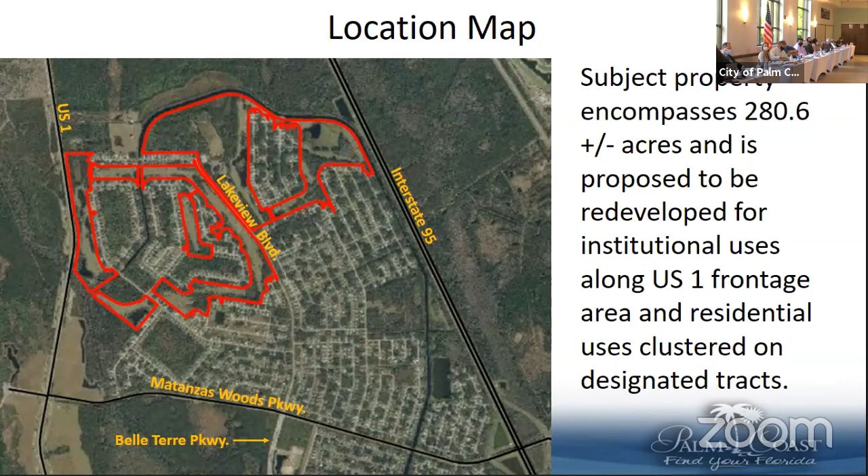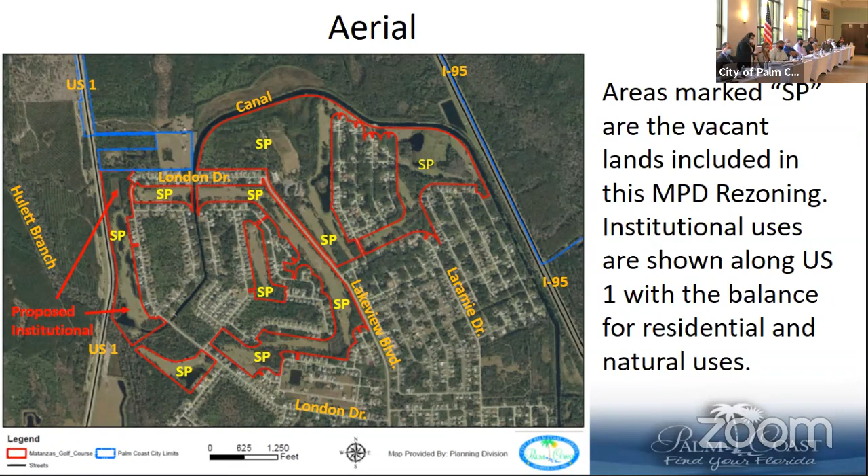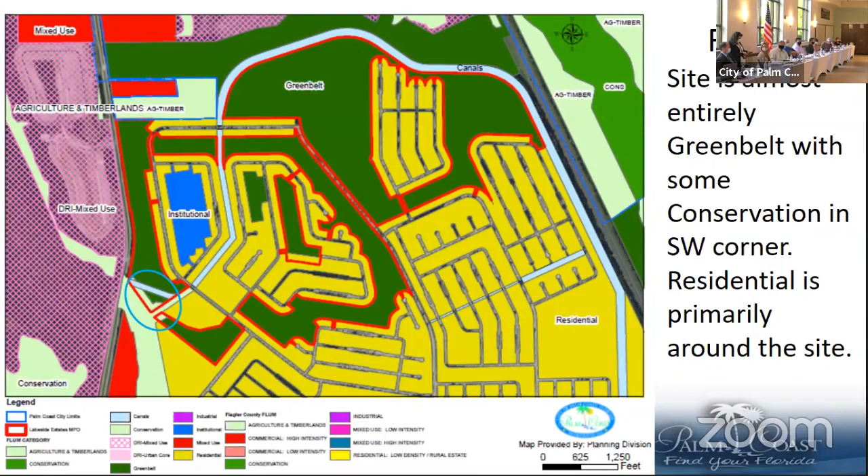And so Greenbelt does allow 1 home per acre. However, we have some conservation land in the southwest corner of the site where the blue oval is along US 1. That's conservation. There's no residential or non-residential land uses allowed to develop in that area.

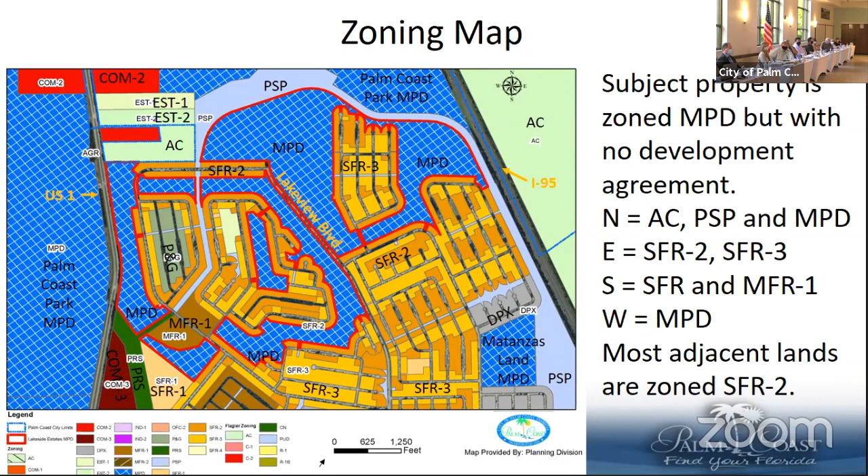The golf course opened in 1985. It was one of 4 courses that ITT developed, and the zoning at that time, since it was in Flagler County, was their own zoning district: Urban Single Family Residential R-1B. That allowed 3 homes per acre if it was developed from a golf course to something else.

In 2004, the city adopted its first comprehensive plan. That dropped the density, since they put the designation on the future land use map of Greenbelt, which capped the density at 1 home per acre.

In 2005, the following year, the city adopted its initial land development code, which was the first 4 chapters, including the zoning section, and that designated the property as GCC, which was Golf Course Community.

The golf course permanently closed in 2007. In 2008, the city did a citywide rezoning, and at this time we finished the rest of our land development code. The subject property was rezoned from Golf Course Community to MPD, or Master Plan Development. At this time, we also carried over the previous provisions of GCC that covered any redevelopment of a golf course community, so that transferred over to the MPD district.

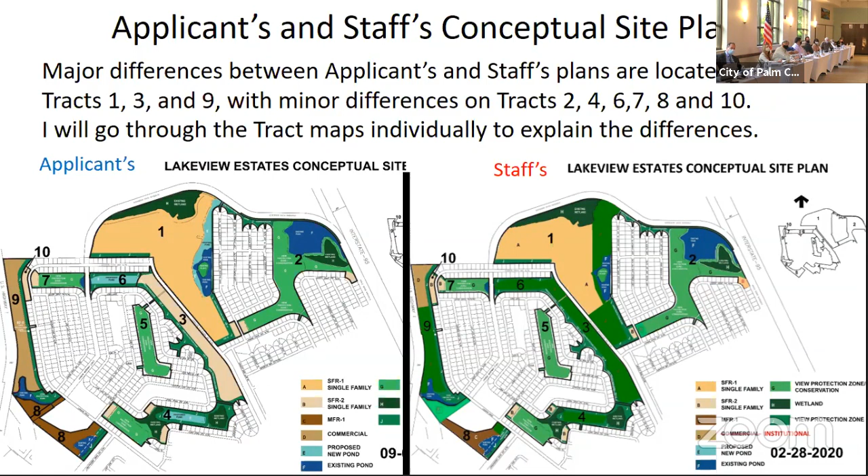On Tracts 1, 3, and 9, we have major differences. On the balance of the tracks, they're minor to sometimes moderate. So since it's hard to see this one, we put the individual tracks on each slide. And we'll start with Tract 1.

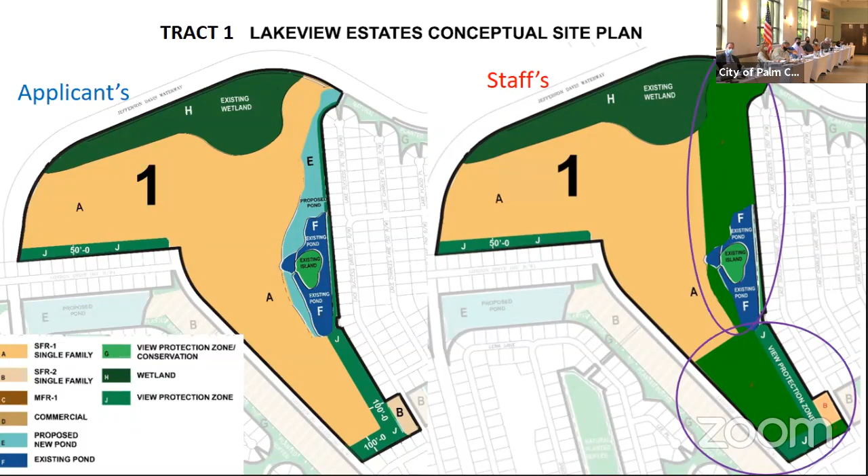So this is where the golf course maintenance building is and the old clubhouse and stuff like that. The area along London Drive, we're in agreement. Once you get to east of Lakeview, we're sort of in agreement. And then inside the 2 ovals that are in purple on staff's map, that shows the area that we're not agreeing with. Essentially the developer, with that tan area, shows where they would like to have development occur. In this case on Tract 1, those are SFR1, which are the smaller residential lots.

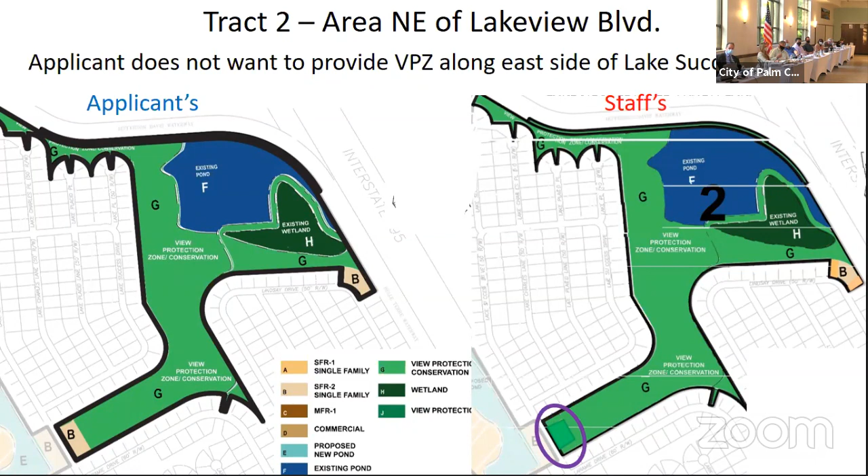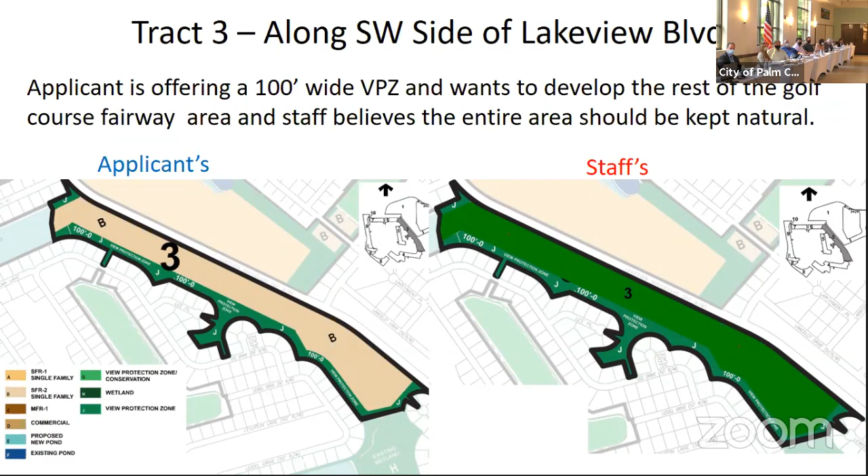This is Tract 3, where we probably differ the most. Staff on the right is basically saying that there should be a view protection zone along the homes that back up to the fairways located south and southwest of Lakeview Boulevard. If you see the large 3 on the applicant's map, just above that is Lakeview Boulevard. The applicant's proposing SFR2 homes there, after providing, I believe it's a 100-foot wide view protection zone for the homes along the opposite side of the course.

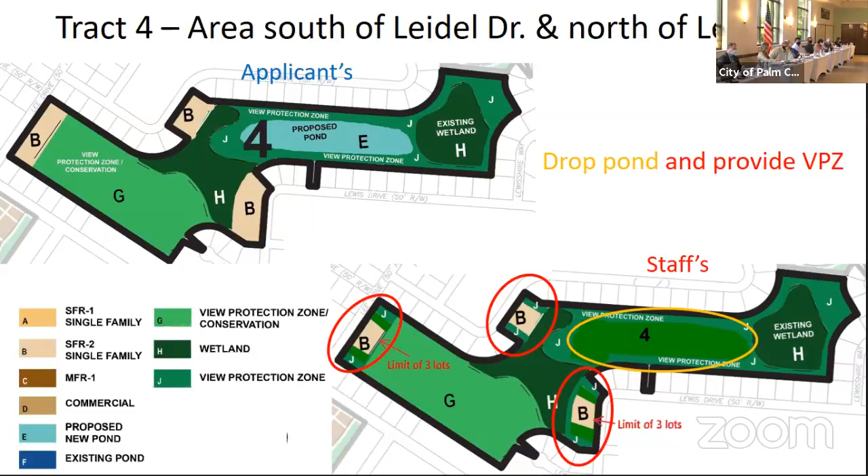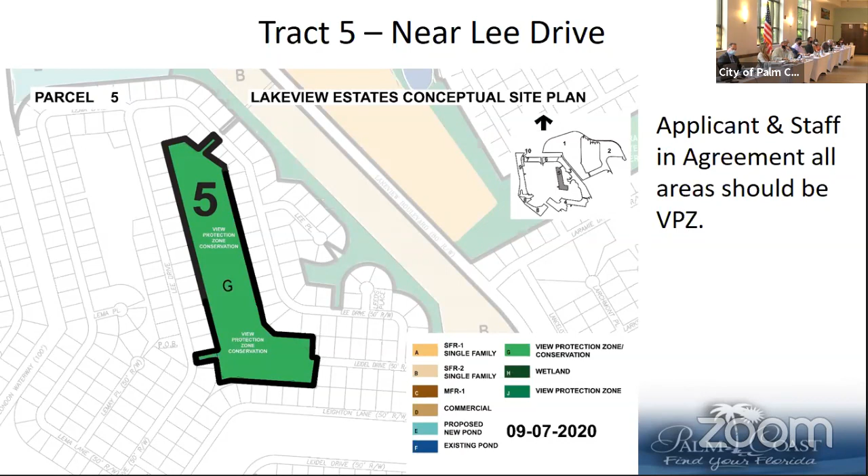This is tract 5, close to Lee Drive. This is one that staff, the applicant, and maybe most people in the room are in agreement with. Basically, all of tract 5 would stay as a view protection zone and remain natural.

On tracts 6 and 7, this is the area south of London Drive, west of where the clubhouse used to be located. On tract 6, the applicant is showing another stormwater pond, and staff is recommending that stay as natural area, shown with a gold oval. On tract 7, where London Drive makes the turn going east-west to south, there are about 2 lots that the applicant wants to put single-family homes on. Staff put a red circle there because that would not provide any view protection zone for the 2 lots on Leaver Drive.

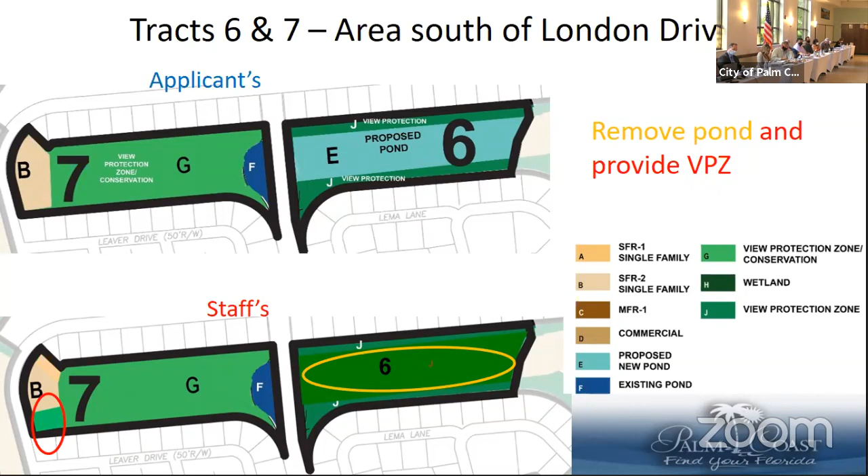This is tract 8, clear at the south end of the subject property. It's in the southwest quadrant of London Drive and Londonderry Drive. Londonderry Drive runs from about 8 o'clock to 2 o'clock, and London Drive runs from 10 o'clock to 4 o'clock.

The applicant's drawing is shown on the left, and the major difference is, if you look at staff's drawing, we've got a gold circle there. They have agreed in the MPD agreement that any multifamily development would stay 150 feet away. There are some lots on the north side of London Drive close to that intersection. London Drive is, let's say, 50 feet wide counting the right of way.

So the first 100 feet of that lot would have to remain as natural area, or they could develop it as single family residential. They've agreed that if any multifamily is developed on this tract, it would be limited to 2-story townhouses, not exceeding a height of 35 feet. The other alternative, which staff concurs with, is they could develop it for SFR1 single family lots. On staff's drawing, we've got a purple circle there.

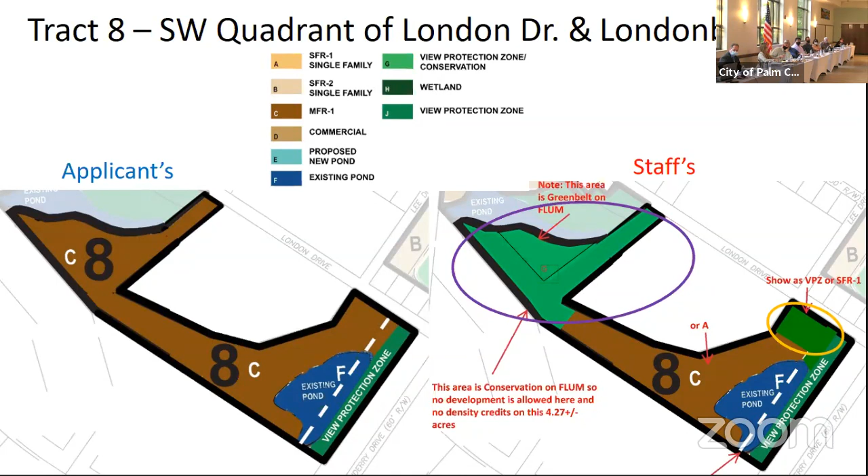These are tracts 9 and 10 along US Highway 1, and the north arrow is to the right, so the plan's been rotated clockwise at a 90-degree angle. Where you see 'applicants' spelled out, that's where US Highway 1 is. Where the number 10 is for applicants, that's approximately where London Drive goes along there.

The main difference here is the applicant is proposing approximately 20 acres of institutional uses on tract 9, whereas staff is proposing 8. Staff's reasoning for 8 acres relates to tract 10, which has the letter B for SFR2 single family home sites. We concur with that, except we're requesting some view protection zones on each end. So not too much difference there.

However, the area behind that - because those are not existing platted lots - section 3.304J does not really apply to that area. So we've supported the institutional uses on that area since it's not behind anybody's existing platted lot.

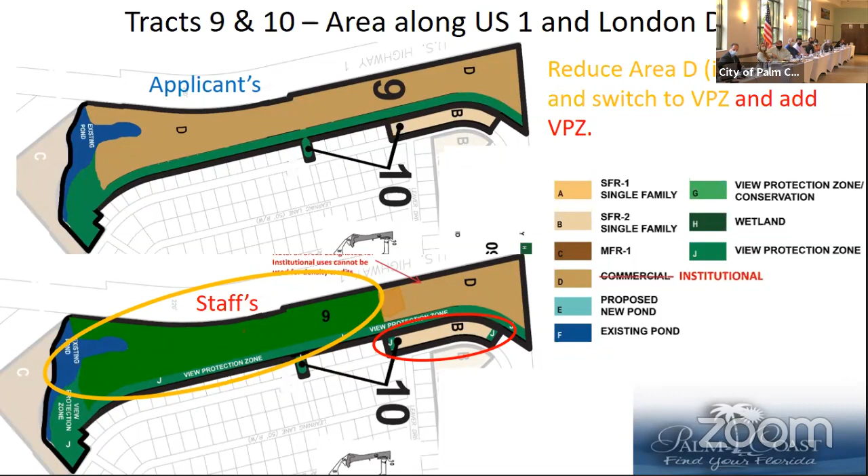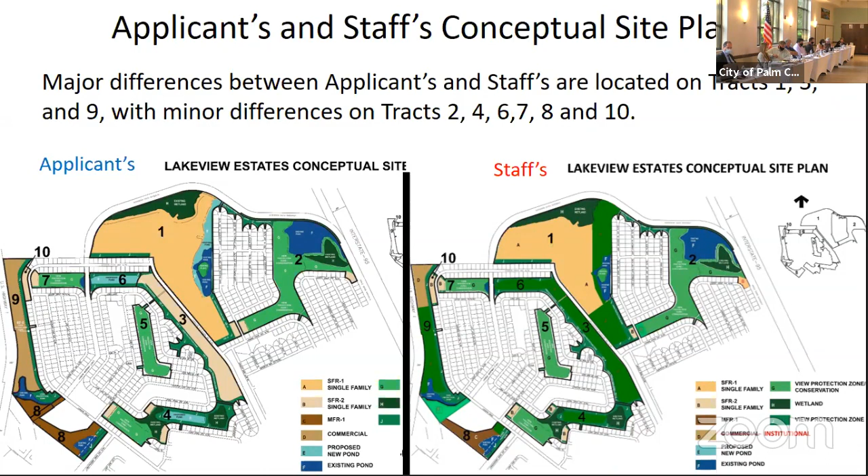Okay, this takes us back, we made a full circle. We're back to the conceptual site plan, and you can see the whole thing again there. So you see we've got changes on tract 1 between the applicant's plan and ours. And then if we go a little bit to the south, you'll see a big difference on tract 3, which is the southwest side of Lakeview Drive. And then the other major one is tract 9 running along US Highway 1.

Basically, this gets back to section 2.0505, which I mentioned, the 5 review criteria. We provided pretty detailed findings in the staff report on this. Essentially, there is an MPD development agreement which we created, and we added what the applicant did not agree with. We added their proposed changes in red text so it would stick out for everybody, rather than having a whole separate document, which creates a lot of confusion, and if you have to print it out, wastes a lot of paper.

So as conditioned by staff, there are really a few changes in the MPD agreement, but almost all the changes match up with the exhibits that we just went over. So if you think of the ovals that staff put on our maps, what we're saying here is yes, this project does meet section 2.0505 of the Land Development Code as conditioned by staff. The MPD rezoning will not create a nuisance, hazard, or any compatibility issues, as it meets all development standards and is in compliance with the designations of the future land use map and matches up with the comprehensive plan. As conditioned by staff, it would also meet all standards for development in the Land Development Code.

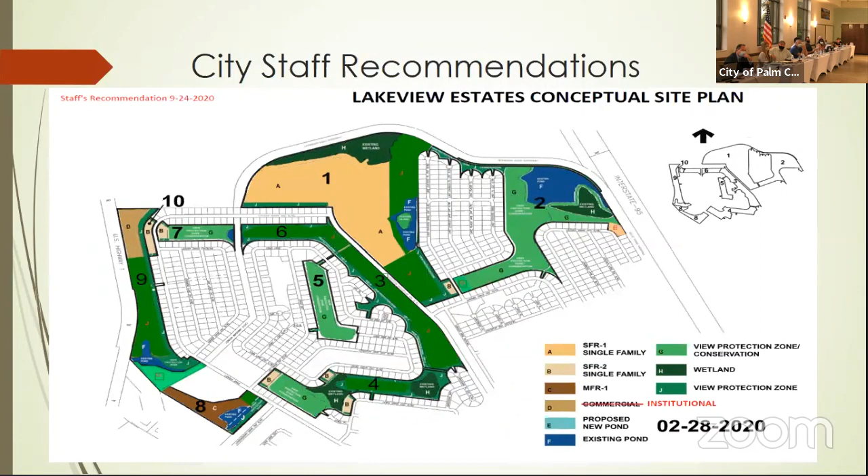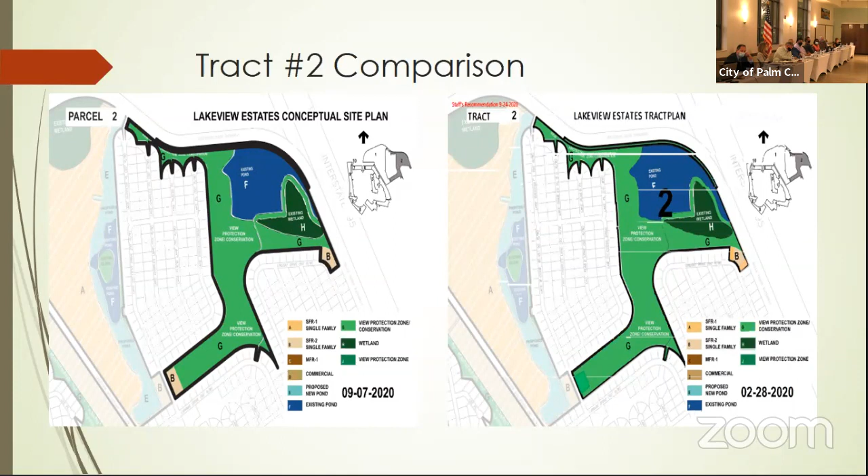So that's tract 2. Now the big one—here's tract 2 as an overlay. You can kind of see, here's 25 feet on the sides here, and up there it's the same, and then the rest of it will remain natural and go back to forest.

Tract 3 is very important to our project. Staff recommends nothing. We don't think that's acceptable because their proposal limits our ability to place and cluster our units appropriately. On the right is staff's proposal, and on the left is ours, okay?

We had started off in December putting a road down the middle of the beige area with lots on both sides, 50 feet by 100 feet deep. This community was very concerned about compatibility and about values. So we went back and did some re-engineering.

What we're proposing to you is to just do single lots along that road, and we're proposing to put a 100-foot vegetative buffer and viewshed protection zone around here. And actually down here it will be even more—we'll show you in just a second.

So this is what we'd like—it's 100 feet. Staff is saying absolutely nothing. We'd like to do the following design. Next one.

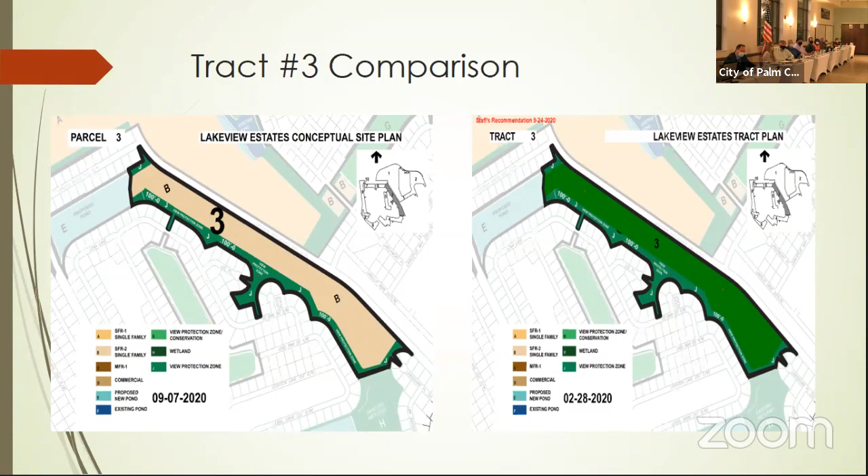So this is a concept that fits. As you can see, these are 12,000 square foot lots—actually bigger than this whole community. And these are 8,000 square foot lots, and some of these are even larger.

So we went back and put fewer homes on that area, and again we put a 100-foot buffer that will remain natural. So this is what we'd like to do, this is what we're asking, and this is a big thing for the community.

So we took some extra time and did a drone video for you—it's about a minute. It's very important because remember, your land development code's actual words deal with existing golf course views. Section 3.0304J addresses that.

Remember, in 2007 and 2008, the city changed this from a golf course to an MPD. So I think this is where we're having some discussions with staff, and we're not able to get anywhere without your and city council's guidance as to what's reasonable on this issue, particularly as it relates here.

We're committed, and we've done our engineering and are ready to move forward to preserve probably 98% of the people's views in this area. So if we can go through this drone video, can you stop at the appropriate areas so we can pause and look at the existing views of these residents.

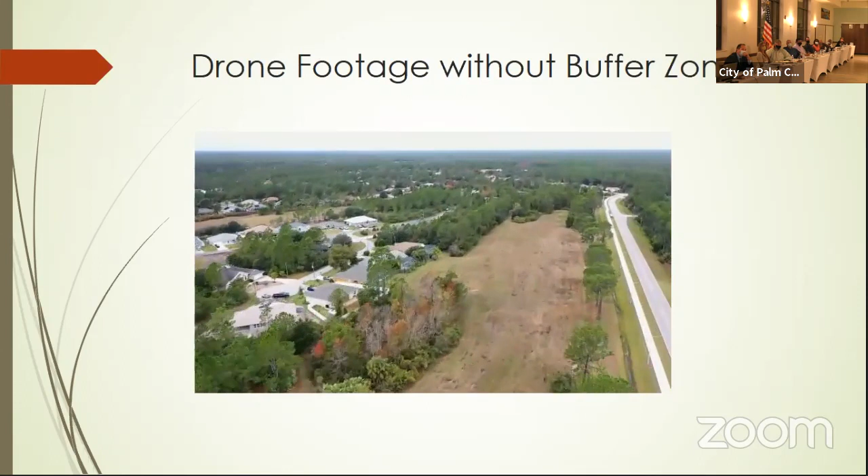So you can see these people and where the tree line is. It's important that I ask you to remember this tree line, because we're going to get to that in just a second. Notice this big tree line. And then we get to these 3 houses, which we'll talk about in just a second. And then we have those houses here, and the rest.

So that's an aerial photo that you can see, showing the existing views of these homes. All but just a few have significant forest behind them.

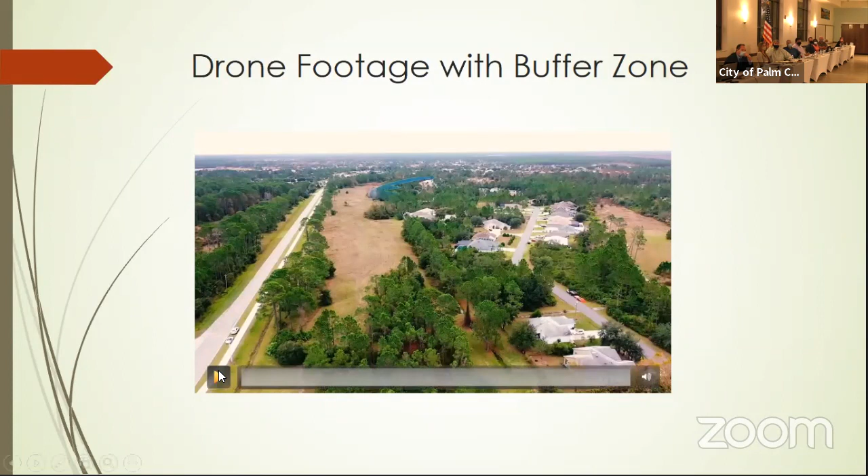So in order to give some scale for the community, and for you all and city council to understand, we got a young person to do some magic. This is the video they did overlaying the 100-foot vegetative buffer view shed protection zone that we are proposing in our plan. So if we can go through that, please.

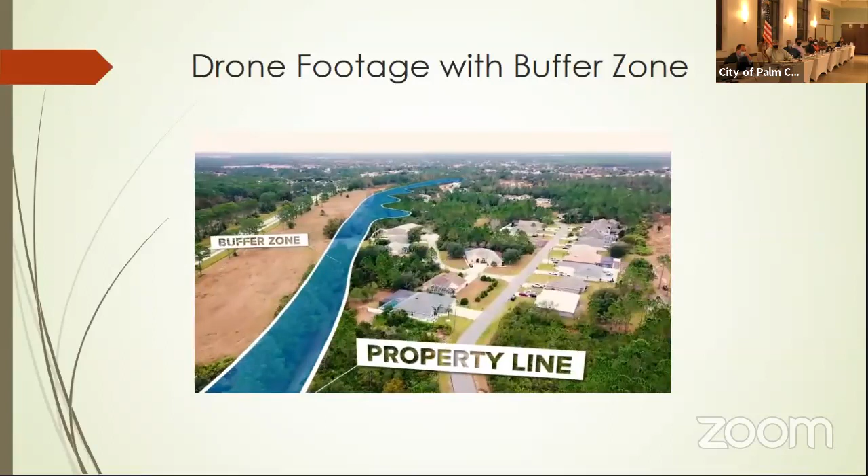So keep in mind what this looks like. This will all remain natural and will never be touched - it will all be under a conservation easement. So these homes don't have anything to worry about. These 3 homes we can talk about in just a second. And everybody else's homes on that road and that area of the property on tract 3, their views will not be adversely affected, and in fact will be preserved and enhanced, as is required by staff.

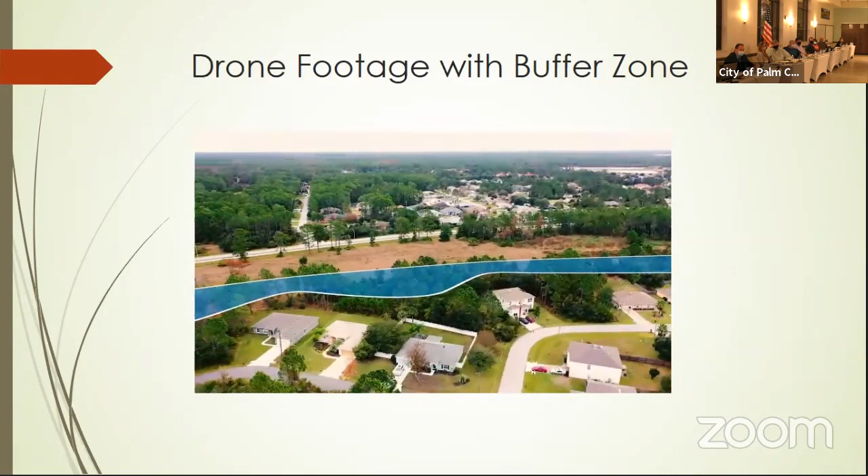Again, the area in blue will all remain in its present condition and will continue to grow. We're happy to work with an enhancement project also in this area.

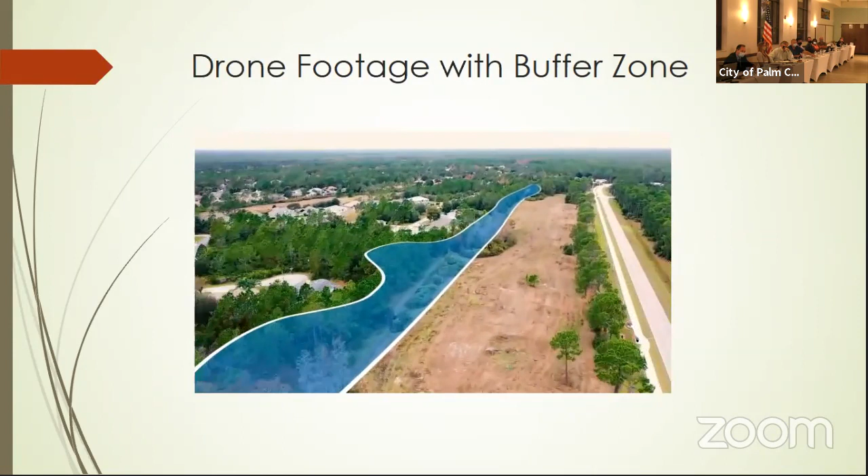Also note, if you go out there now - these photos were taken back in January - the fairways have grown up to roughly 6 feet now, I believe. So as time goes on, the forest will come back. We've seen that in some areas of town center. So all this area here is going to remain the same. All these trees in this zone are able to stay and, in fact, enhance and grow over time. So we know what their view is today, and we know what it'll be under our proposal. So can we go to the one before that?

So that's what we're proposing on tract 3.

Tract 4. Hey, Michael, can you stop for a second? Yes, sir. Can we keep the comments down, let the man speak? You'll all get a chance to speak to the board under public comment. Thank you.

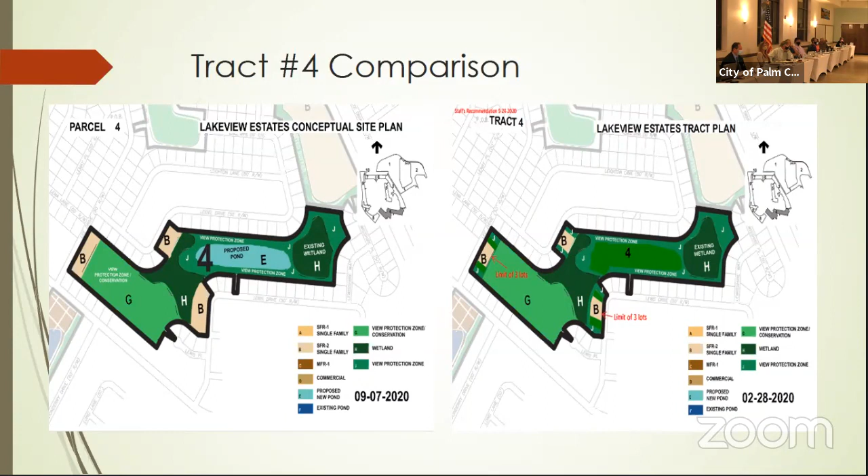So if you go to the next slide, what we've talked about with staff is they said to us, don't mess with the area, okay? Leave all the trees so we can go in and leave, maybe not every single tree, but I'll say 98% of the trees in the fairway area, in this open area, and put our stormwater pond so that these people's views will not change. We'll have stormwater not only for our project, but can work with the city to add additional stormwater drainage and protection for the area.

The issues of lots on the corner, we're fine with. We agree with staff that we need to put buffers, those viewshed buffers, on the adjacent side. So that's 4. The only difference really between us and staff is that we are proposing to put this stormwater facility in here to enhance the area.

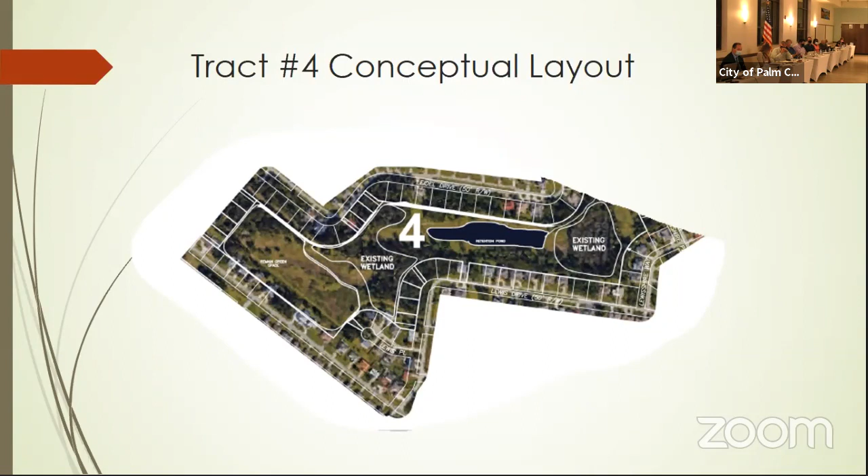And the same goes for tract 5. People who live on tract 5 will be happy. Nothing will happen, it'll go back to woods. We've talked to some of them about their ability to mow it and maintain it the way they have been for the last 14 years since the golf course, or 12 years since the golf course closed. So there's no development on that.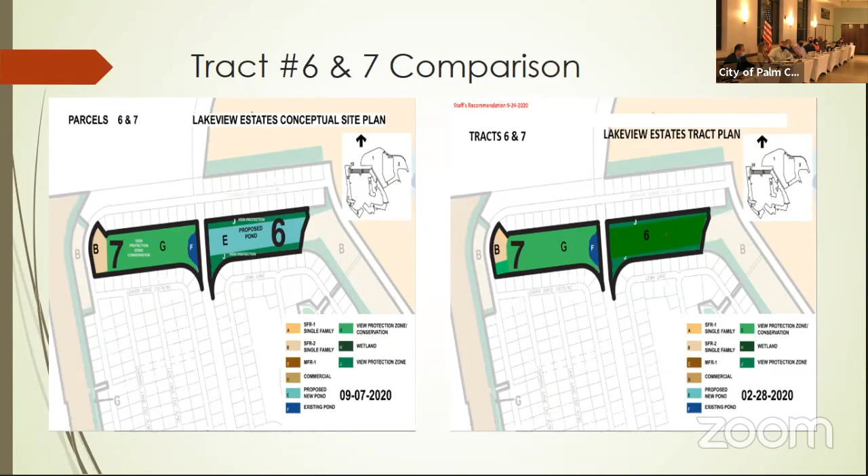Is to do the same thing. In the existing open area, put the stormwater retention, leave all the trees that are there today, preserve everybody's views as they see them today, and in the middle put a stormwater pond. There may even be opportunities to create amenities for the communities around those ponds. That's something that, I guess, we can get with staff, and we need some guidance from you all and from city council.

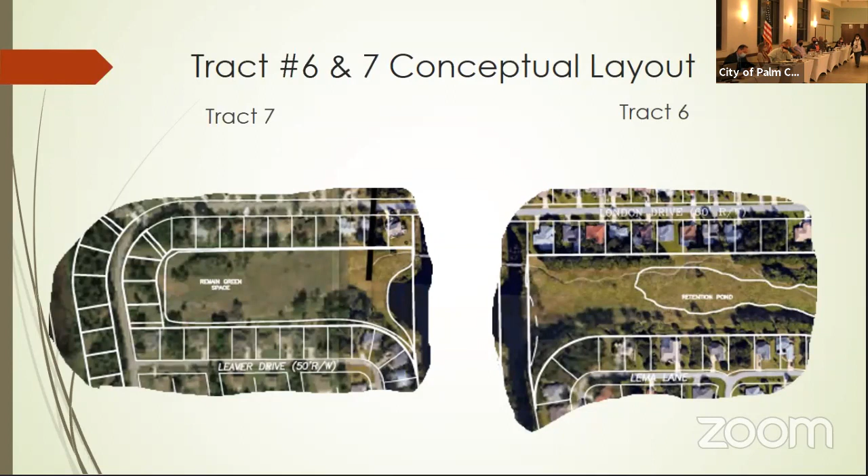And tract 7 is, we're fine with that. So that's 7. 8, we talked about.

That's the parcel. The land development code requires that we have 100 feet from the area of any development. Right now, these people see the lake and there's trees around the back. We're fine with that, and we're fine with putting the 100-foot buffer up here, whether it's landscaped or berms and stuff, and then doing the townhouse product or the single family that is adjacent.

One of the things I'd draw to your attention with this piece is right now it's owned by Seagate, and they have a single family development. I don't know if the preliminary plat's been issued yet or not. And this is a multifamily tract. So putting a medium density townhouse product, 35 feet in height, is a transition either way, or we're able to put single family homes there. So that's 8.

And this is what it looks like from the aerial view. You can see most of this pond, it could be shaped a little bit, but most of it will stay because it's needed for stormwater, and it's not adjacent to anybody except out in the front. So 9 and 10 are a difficult one.

We've met with the residents, or not all of them, but some. I forget the lady's name that had us at her house with her neighbors there, so forgive me, I apologize. She was very gracious and had lots of cakes and cookies for us. Bob Dickinson, Alex, and I sat down and went through it with them.

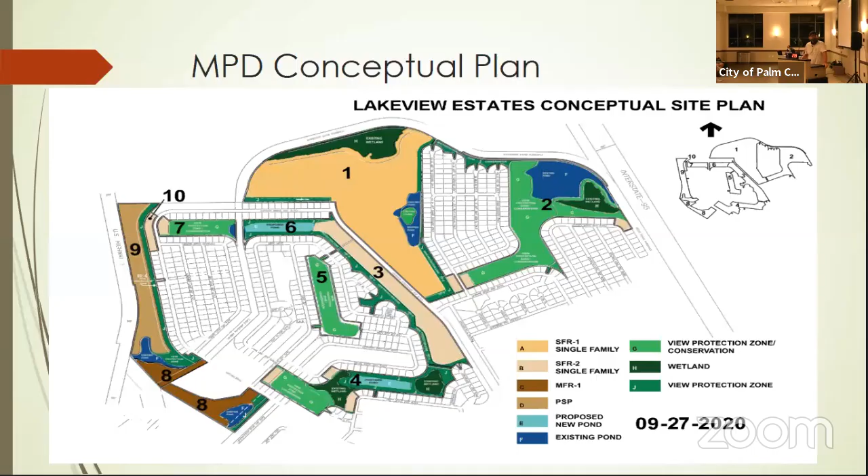I'm actually speaking for about 4 out of the 5 residents that live on Londonderry that face the pond there. No, go back to the other one. Yeah, that dotted line expresses our property here. That line represents what exactly? From our property to there. So obviously, around 8 to 10 feet behind our property line is the golf course, and the golf course goes from our property line about 30 feet, maybe 40 feet, to the pond. And over the 20 years I've lived there, we had an agreement with the golf course back in the day that we were allowed to maintain, upkeep, and take care of that property, which we all do quite well. We built irrigation systems, fences, gardens.

It's well maintained, it looks very good. And we were concerned if there were any particular plans for that portion there, what would happen to that piece. Any fencing, or would you guys even try to do anything there? Because that would obviously obstruct the view, but I wasn't sure if there's anything that we don't see here. As well as, you've got the spots for the lots of all the other properties, but where would those townhouses be along this section here, or across? Is there nothing set in stone there yet?

Yeah, please, again, address the board, and you can ask your questions, and we'll get an answer for you. Okay, what do you say about that? You guys don't even know. We're going to address that after public comment, so. Okay, so yeah, that's all I got. So that line to Londonderry is protected, right? All right, beautiful.

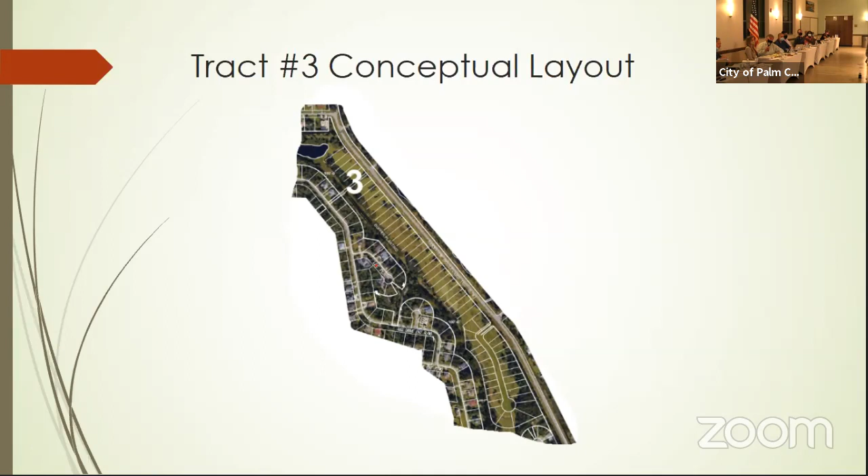These issues are both Florida statute and federal statutes.

How you do this testing is mandated by state and federal government. They tell you how to do it, so when someone is a certified insurer, they have to follow those rules, and the reports have to be approved.

As I said earlier, it's not significant, but roughly where tract 1, the old driving range, is, there are some additional levels that have to be remediated. It's a very small area, probably about 100 yards, that needs remediation. They dictate how you remediate, how you remove material off site, and how you put it back together. That's all we have right now. But before you can disturb any ground, you have to get approvals from the state, federal, and city governments confirming it's been done properly.

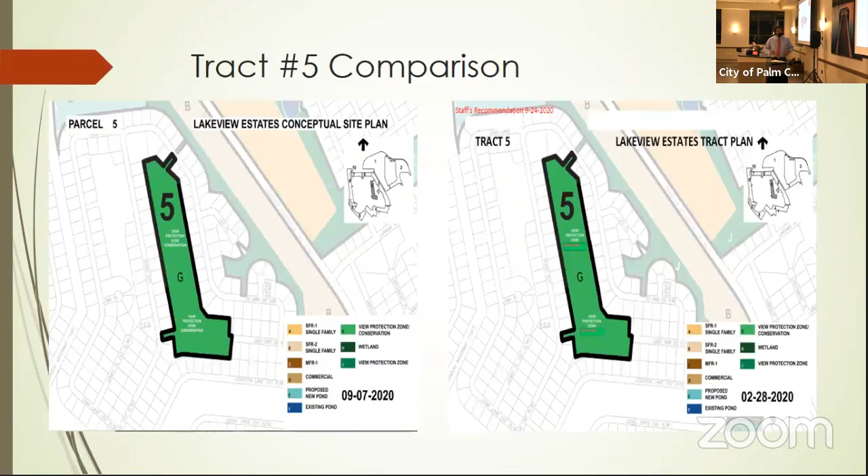The next thing I wrote down concerned the buffers on tract 8. There were a couple questions about tract 8. It is for multifamily, but limited to 35-foot townhouse product. Your land development code says you have to have 150 feet here and 150 feet from the top. This would be about 100 feet.

That buffer is there because it's adjacent to vacant land. The code just says you need to follow the land development code setback. There were residents who lived in this area, and if you were going to play golf, there was a golf course area basically between their property line and the top of that. Historically they have maintained that through agreements with prior owners, and we're still committed to that — they can maintain their access. We have no problem with these residents not being impacted at all. In fact, with this lake, all kinds of trees are going to stay, and we're fine with it.

Even at the end, that's not a fairway? Haven't gotten there yet. So these residents we're talking about maintaining that bank — we're fine with maintaining that condition of use.

The other question that was yelled out was about the fairway — was this a golf course? The code talks about golf course use and has golf course language in it. How the city council interprets that, I don't know. We in city staff have said the proposal is consistent with the land development code, and that's how we have to implement it, and how we'll answer that question. So is it a fairway? No, it's not a fairway, but yes, the code does make reference to terms of art associated with golf, like fairway and golf views. That's the only answer I have to that specific question, sir.

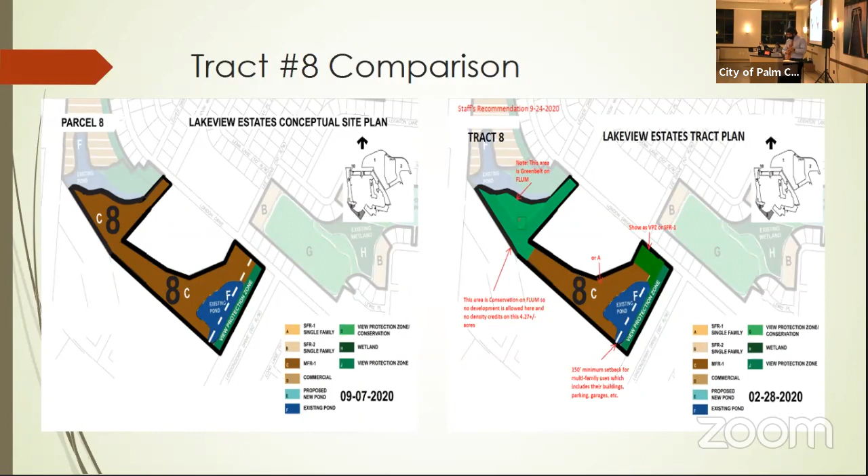The next thing I have, both refer to tract 9. If you want to bring tract 9 up there — the first was ingress and egress. Was it just going to be on US 1? Yes, ingress and egress will be limited to US 1. There will be no access to the interior residential community.

The second question a speaker asked was about the existing retention ponds on the old fairway on tract 9 — what would happen with those? What we proposed to staff is that presently that stormwater system is not a conveyance system; it was just there to accommodate runoff and for golf course beautification. The ponds don't necessarily drain anywhere or accommodate runoff from the community. What we proposed to staff is that in this buffer we would create and establish a stormwater zone for these residents so they would have waterfront too. What would happen presently, since there's no flow through those ponds, is that they'll go back to a natural state and begin to silt in.

So that is an issue that needs to be addressed by us and the city. The way it works right now under this proposal, it would just go back to trees. I think our engineers, and your engineering background, sir, would tell you that it would begin to silt in and those ponds would not be functional anymore. Our belief is that this needs to be looked at as a global solution on how we get stormwater from up in that area to come down into the existing lakes and ponds. But that's what our proposal puts forth, not city staff's.

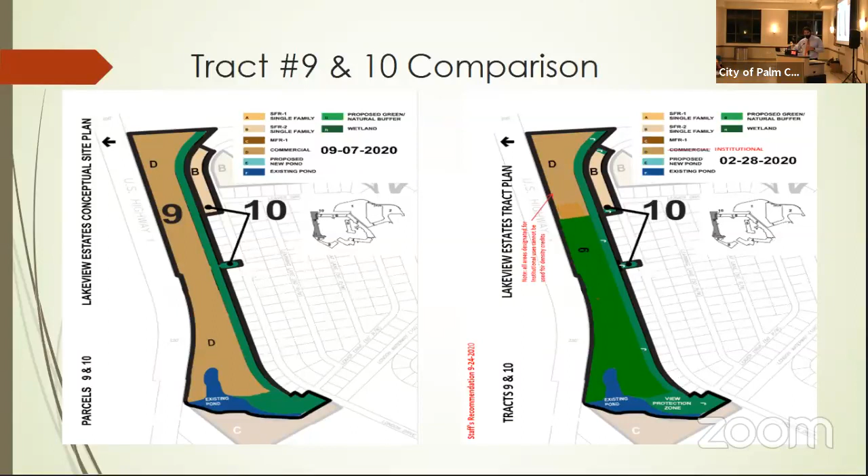I believe that had to do with this right here. Here's their property line, and this whole area has been maintained by those homeowners down to the water's edge, and that's fine with us. All right, those are the items that I had written down.

Do you have any others? Yeah, I had a couple, and if we look at them collectively, it impacts your decision. There's a lot of conversation. Can you put up the comparison of one, please?

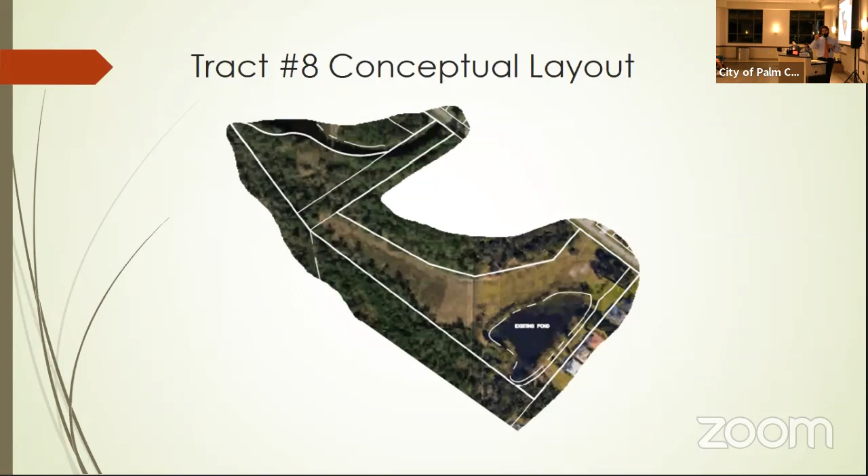Let's try to get to the distilled version and very fast. The city's plan wants this to be a view, at 700, 800, 1,000 feet, and up here it's 400 to 600 feet. So when you have to place the units in this smaller area as opposed to here, what happens?

We get smaller lots. When we met with the city and the citizens, we were trying to get back to lots that were compatible. As it affects tract 3, those are 12,000 foot lots, larger than those adjacent. The ones at the southern end of tract 3 are consistent, about 8 to 10,000 square feet. So it's this whole idea of a balance between this view shed protection issue, how big, how small, what we put in it.

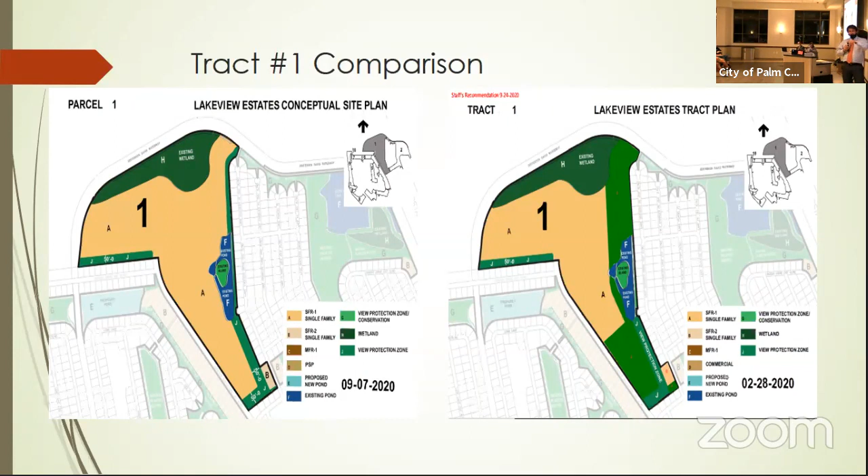If we can do stormwater in there, we can preserve more open space and make buffers larger. If we have to do something like this, it forces design standards to be more dense and urban-like, as opposed to consistent with the neighborhood. So it's a balancing act. This view shed issue is subjective. Whatever you choose will not be inconsistent with the comprehensive plan. But we assert that by our plan, particularly if you do the one that shows on tract 1 with the ponds.

Next one, please. When all this becomes pond, property values happen to be benefited. We can fit larger size lots instead of making smaller lots here, and we have opportunities to do more creative design that would benefit the community. By doing this, we're able to put larger lots and fewer lots on tract 3. So we think it's a better balance than just saying nothing and forcing more dense development. So that's kind of a hybrid of the questions of buffers and size of lots that we had.

There was a question: if the city staff proposal was the one you went with, what would happen? The city proposal would force us to design smaller lots in a more dense community and allow us less opportunity, as you see in the middle, for recreation spaces. So that's why we feel our plan is better and provides more opportunity for us to do some planning.

In my personal opinion, city staff would like guidance that if you go with our plan, we could then entertain some new ideas, including adding additional stormwater storage and drainage that would help the flooding that happens up in that area sometimes. We could address the issue of parks. We could address the issue on tract 9 that would improve the drainage. So that's kind of where we see it.

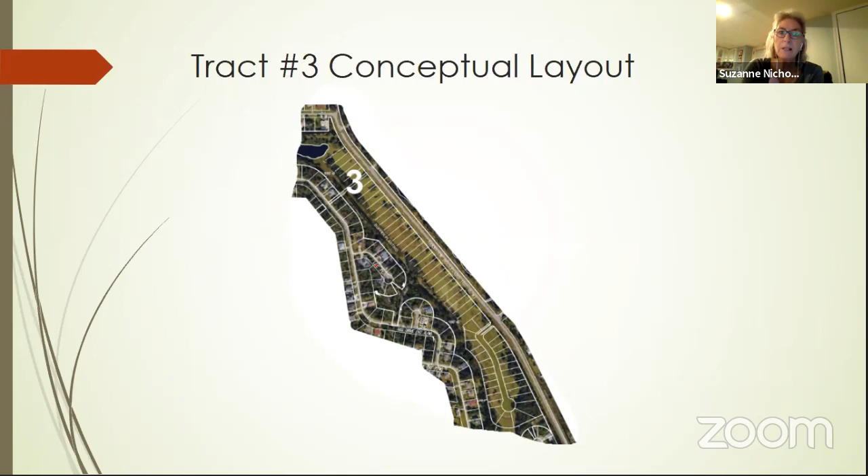Tract 1, conceptual layout 1, was allowing the area between these homes and the back of our proposed homes to be 50 feet and go back to natural. We could supplement with trees and undergrowth so that it would be 50 feet. I think we measured this as about 60 feet wide. So to give you an idea, that would be about a 50-foot natural buffer that would be placed into a conservation easement under layout 1.

I'm sorry, they didn't span over to the image before you started talking, so I'm talking to the right side of the plan. Here? To the existing, no, one more over to the white space. Keep going over to the white space to the right side of the plan, where the existing neighborhood is.

Correct. What is the separation between your development and the existing neighborhood? 50 feet. So we have 50 feet between new houses and existing houses? It would be 50 feet under this concept, a natural vegetated buffer, letting it go back. Or under option 2, we could put the stormwater in that area and increase that to at least 100. We think the latter is better because it brings more value to both sides of the property.

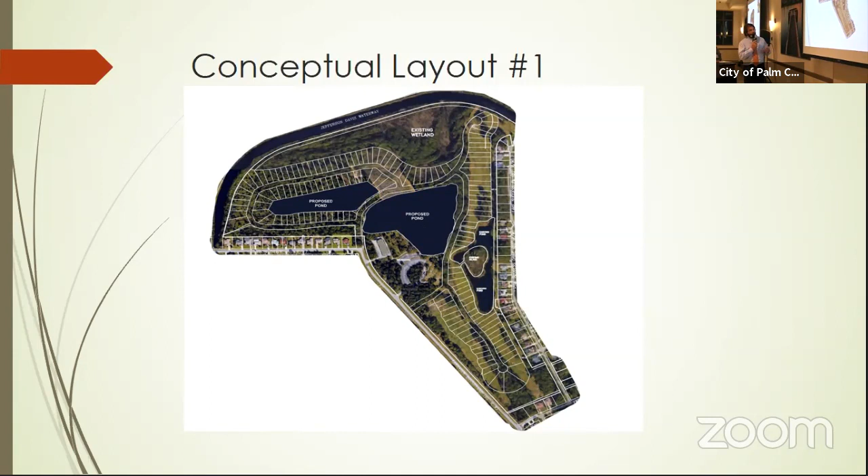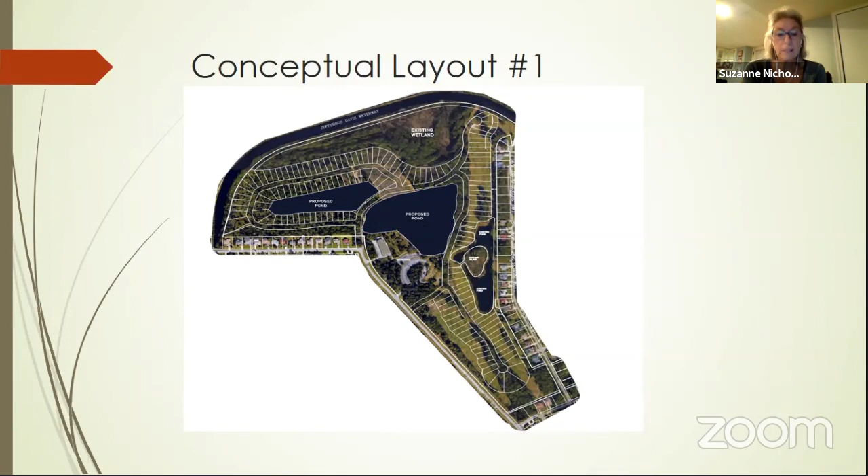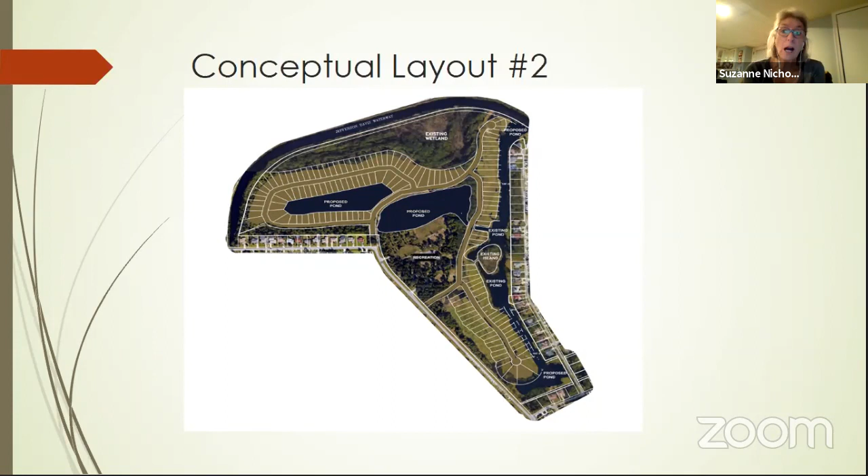Okay, thank you. And then I have a procedural question, which relates back to the previous board members' comments. I want to compliment the staff because I think they've done a superior job at analysis and making recommendations for consideration. I also think the applicant has done a great job responding to the residents' and neighbors' requests. It seems like there's a blend of the applicant's recommendation and the staff recommendation that would probably yield the best solution. I'm looking for guidance for the board in terms of our voting. It seems like we have to vote it up or down, and if we vote it up, does that mean the applicants and staff still keep working and perhaps come to a compromise? So procedurally, I'm looking for guidance.

Neysa Borkert, City Attorney for the record. The recommendation of the board can be whatever the board sees fit. You don't have to go with one or the other. You can blend it, go with one, or go with the other. It's really up to the board's pleasure as to where this lands and how it goes to city council. Any recommendation made here will go to the city council, and the city council will take that into consideration. But the motion would need to include any changes that are made. As you can see on page 10, the agenda item at the bottom has a recommended action, which is what staff is recommending occur. However, that can be modified in any way the motion maker on the board sees fit.

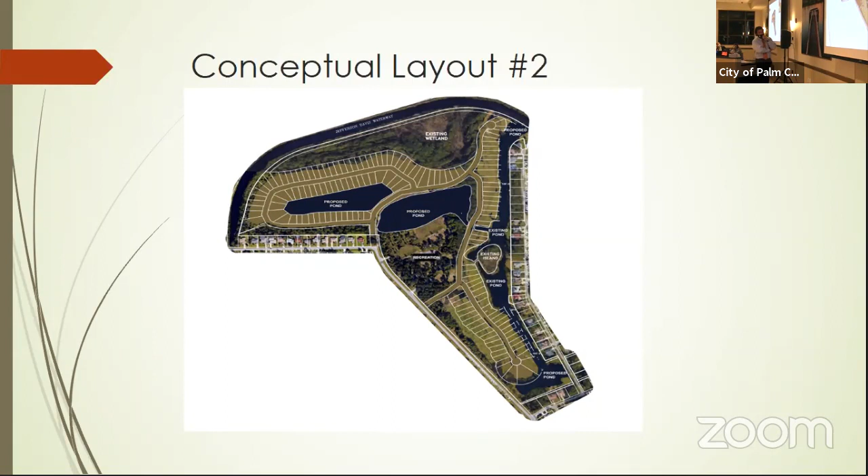All right, I think we have one more board question. Regarding Tract 3, had the planners given any consideration about not backing cars out onto Lakeview Parkway? I don't know what the classification of that road is, whether it's an arterial road or a local road, but have you given any consideration of egress and ingress into those 30 or 15 driveways? Yes, sir, that is a collector road as classified under the city. Our traffic engineer can talk about turning movements, but we looked at that. We talked with staff multiple times about different ideas. We believe that works and satisfies the technical traffic issues and safety things, but if the planning board has an idea they want us to consider, we're open to that also.

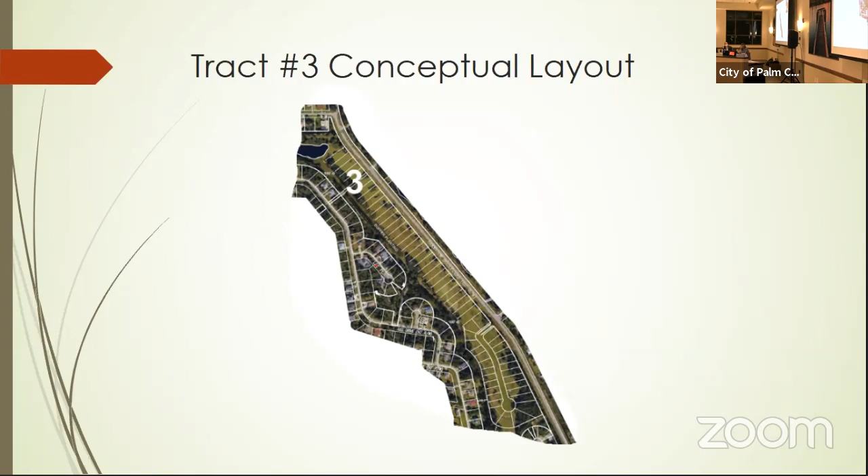All right, any other questions from the board? I just have one additional comment. I'm just concerned, according to the Land Development Code 2.05.05, letter D, the proposed development must not create an unreasonable hazard or nuisance or constitute a threat to the general health, welfare, or safety of the city's inhabitants. I'm concerned that the environmental report was not provided prior to this meeting, given the fact that this was previously a golf course and the land was treated for use as such. When we're looking at the largest tract where you want to develop the majority of the homes, I'm really concerned about the long-term risk to the future residents of that tract.